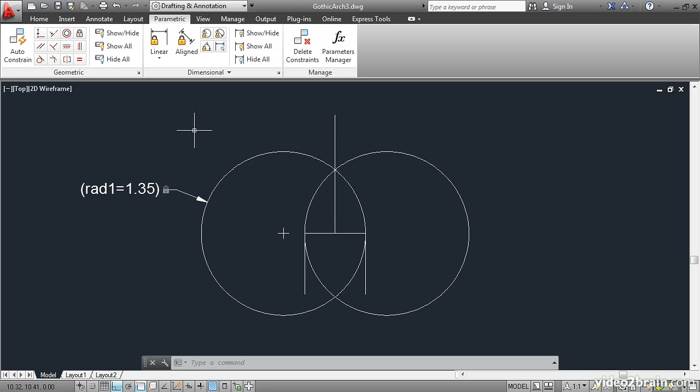In this lesson, you will create a dynamic block whose custom grip drives a complex system of geometric and dimensional constraints. You will also learn how to hide specific geometry within a dynamic block by converting selected objects into construction geometry. Open the Gothic Arch 3 project file and select all the objects on the screen with an enclosing window.

And then type B-Enter to execute the block command. Give the block a name, Ogive Designer, and then pick a point for that block by clicking this button and snap to the midpoint of the horizontal line in the middle. Choose Convert to Block and Open in Block Editor and click OK.

Notice that the geometric constraints are visible here by default in the block editor. Now let's assign a new dimensional constraint within the block editor. This is going to be different than if we had assigned this outside the block editor, because the block editor will also create a parameter for us that will allow us to edit this as a dynamic block.

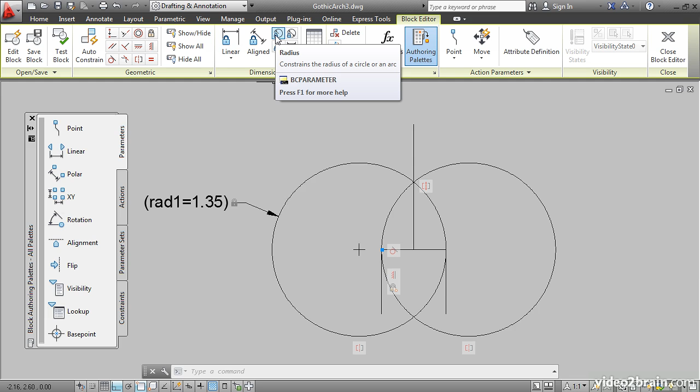So click this button to assign a radius parameter and constraint to the circle on the right. Select it, and then hold down Shift, right-click, and choose Quadrant, and click the eastern quadrant of the circle. That creates a new variable called rad2, and it's equal to the current radius of the circle, which is fine. Press Enter to complete the command.

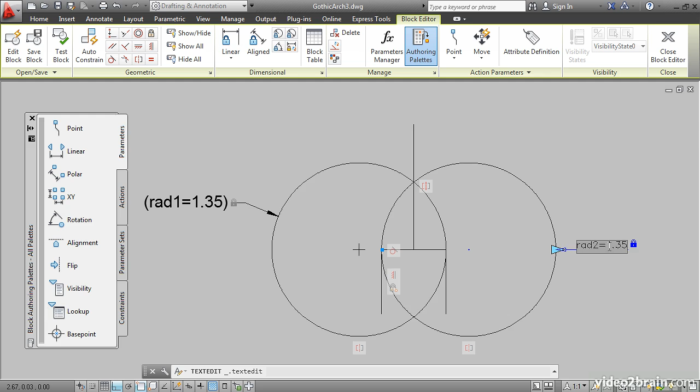You also get this grip right here, and this will be used to drive the entire system. So this is a dynamic constraint that can drive the whole system. To demonstrate this, I'll double-click on it, and let's change this value to 2. Enter. So it's driving the system. Over here we have an annotational constraint, which is sort of along for the ride, if you will.

Let's also hide some of these lines, which we don't really need in the completed dynamic block. Click this tool, Construction Geometry, and then select the vertical symmetric line and these two shorter vertical lines. Press Enter, and then choose the default option, which is Convert. They now show up with a dashed appearance here, and they're grayed out to indicate that these lines exist only inside the block definition. They won't appear when this becomes a block reference.

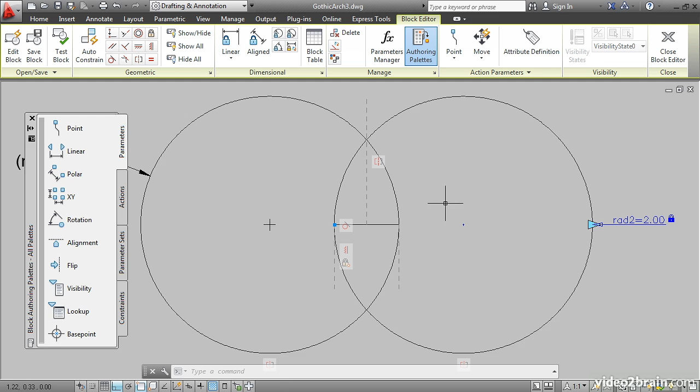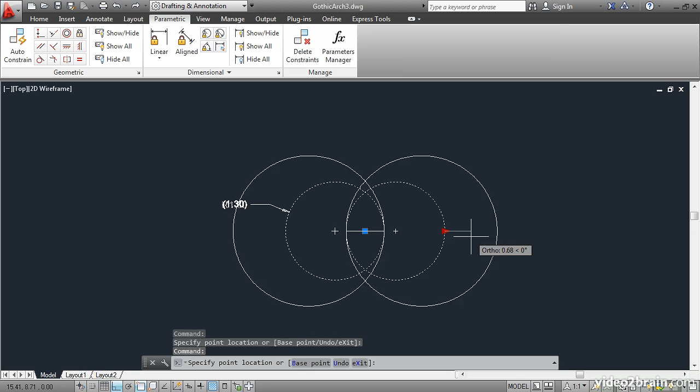Go ahead and click Close Block Editor and then Save Changes. It says it's not fully constrained, but that's okay. It will still work as we have designed it. Let's go ahead and see how it works. Click on it, and you'll see the dynamic block's custom grip on the right. Click that grip and move it, and you'll see that it works as intended. The circles scale together, and we get a different ogive shape as we move the grip left and right.

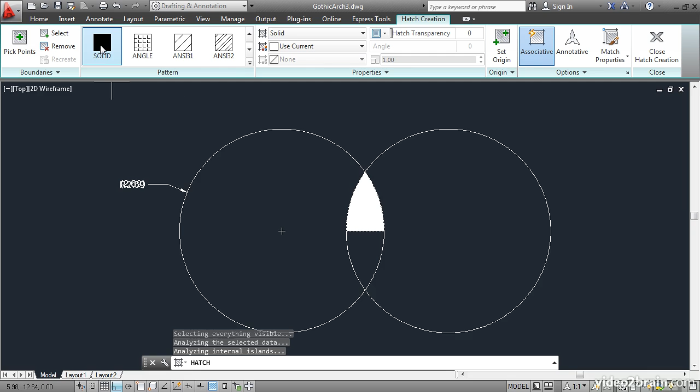Press Escape to deselect, and let's just add a finishing touch. Press H and press Enter to execute the hatch command. Click in this area and change the pattern to solid. Change the hatch color to green and click Close.

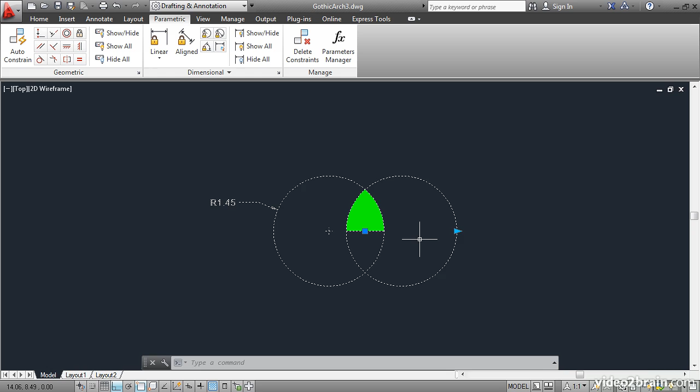Now let's go ahead and edit this again, select it, and move the grip. The hatch pattern is associated with the dynamic block, so it automatically changes its shape as we adjust the shape of the ogive. So in this lesson, you have learned how to drive a system of constraints using a dynamic block parameter with a custom grip. In this way, you have created a simple user interface for the exploration of the ogive shape.